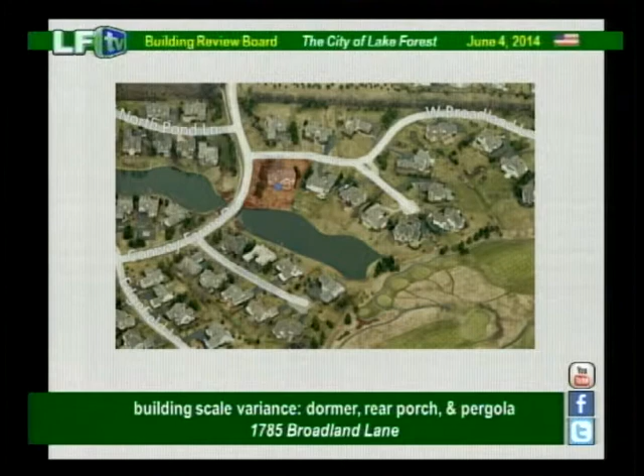A couple of items that I really want to point out of importance is the location of Conway Farms Drive in relationship to our house. Our house is this reddish area here. We do get great views of the pond behind us, and we do get some views of the golf course just down the way. We are facing south as well, majority south.

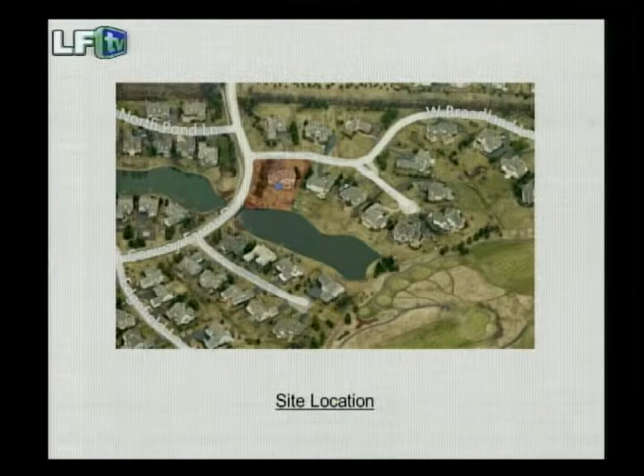So when we looked at this project, what we were looking for is we were trying to get some continuity and just take some of the massing down of our existing rear elevation. Clients love the front elevation, love the porch, love the details and the quaintness of it, and we just didn't have any of that at the rear elevation. So to us, this rear elevation did not have any consistency with that front elevation.

We had the two-story massing. We don't have any covered entryways over the access points. We have two access points into the house currently. And there was just a lacking of a connection with the exterior spaces.

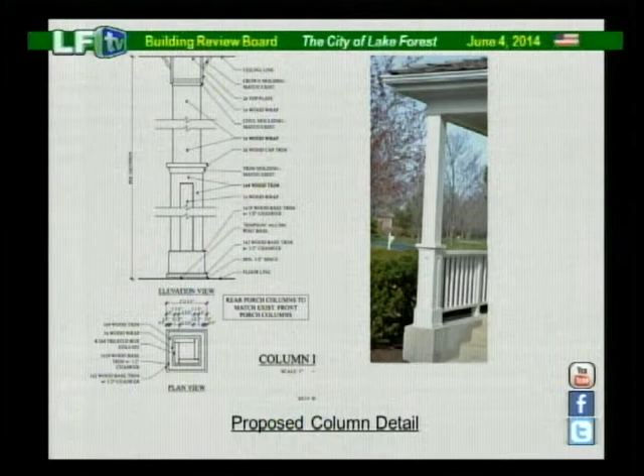Column detail - this is the column detail that we have in front of the house, and we're proposing the exact same column detail at the rear. That would be these elements here, just to tie in the front to the rear.

I'm just going to leave a couple of slides up here for visual sense, and I think the homeowners would like to say a word or two about the project, and then we'll open it up for questions.

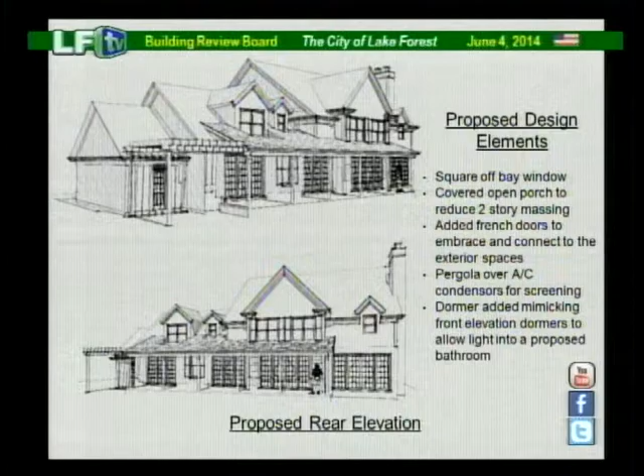Hi, good evening. My name is Ted Langan. This is my wife, Amy. We're excited to come here and talk to you all about the things that we'd like to do to the house. We love the house, we love the neighborhood, we love the open spaces, the views of the surrounding area and the golf course.

We think that we can further enhance the house and the neighborhood by the addition of this porch and really open up the back of the house and take advantage of the terrific views we have of the lake and of the golf course. So I think it'll help with the consistency and the appearance of the house. We're trying to tie the front and the back together. So with that, I'd like to take any questions that you all have.

Thank you very much. Is that it? Thank you. Okay, great. Kathy, staff report, please.

Thank you, Chairman King. This is a request for a building scale variance. The code does allow for variances and establishes criteria which the board is charged with using and reviewing. In this case, as detailed in the staff report, we believe the proposed request for a variance meets the standards. The architectural elements that are proposed actually do serve to help reduce the visual mass of the rear elevation. This house is located in a way that the rear, during certain times of the year, is viewed directly from Conway Farms Drive, a public road.

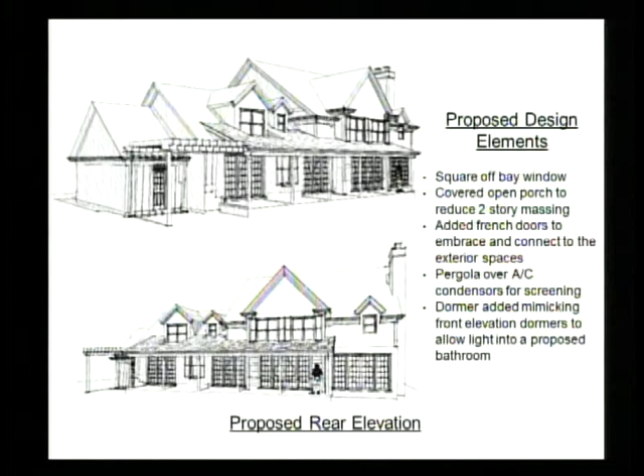Is there a proposed landscape plan? There is, I believe one was included in the packet, if I'm not mistaken. There are a bunch of dying trees right now that we're planning to remove and replace, and just add to the landscaping that's there now.

Is the intent to soften that corner from the road? Yes, definitely. There's an overall landscape plan we're working on. We're going to take all those big old dying Austrian pines out and replace them with new trees, and relocate a couple of the existing ones to add privacy and soften up that corner.

Does the HOA have an interest in the landscaping as well? Yes, they do. They control that too? Yes, they've seen it. Any neighbor concerns? None that we are aware of. Are these proposed columns in the rear matching the front columns? Yes, the detail matches. Thank you.

Good evening, a few questions, starting with the second set of French doors being added to the west. That's a lot of light looking right into effectively your door to the stairway and the laundry room. Visually, had you considered, rather than using such a full set of French doors where that view wasn't really necessary, utilizing something that might match the window you're leaving in place, just to help break up this wall of glass you're adding along the back wall?

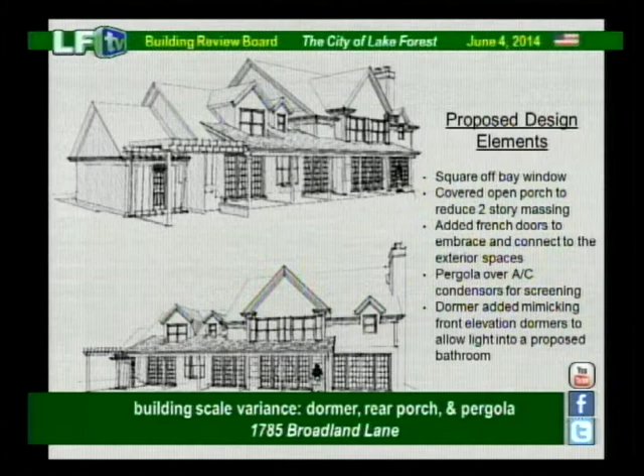Right, if I can just change slides here. Our visual sense when we were laying this out was with the columns as well. From this perspective, which is a straight-on one, we were trying to create some rhythm with the columns and the French doors behind. This seemed to be the logical place to keep that existing window with the columns spacing the way we had them, and then this triple unit between two of these columns. It took a while to get the spacing right because there are a lot of elements we were trying to fit within a column spacing that should be consistent.

Well, to take your logic, if you look at your main mass, just to the right of that, where you center the middle column in the middle of those four panes of French doors, could you not follow the same logic there? You could. I have to look at the plan here, but right back in here, I believe, is where we have our staircase. And if I slid these over too far here, I think we would miss some of the light coming to that staircase going upstairs.

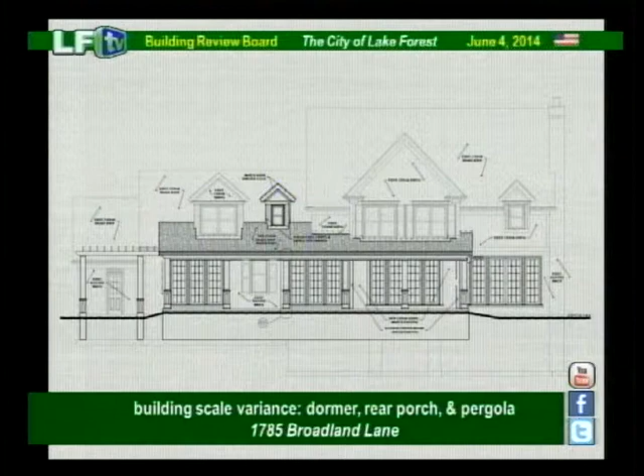Okay, that's all I have. I appreciate your addressing my comments. Thank you. Anyone else, questions?

No? Well, I think it's very nice, and the trellis is going to be a very nice focal feature for passersby coming across the pond or the roadway, which leads to a thought, purely a matter of personal preference, but it seems like a great opportunity for some hanging flower baskets or something of that type hanging from the trellis, giving it a splash of color to enhance what it is. We're thinking we're on the same page.

He's way ahead of you on that one. Oh, you're way ahead of me, okay. There you go, you probably picked out the flowers already, okay. No, I think that's great, and it fits right in with what you're doing here.

Thank you. Okay, just one question. The second floor, the additional dormer you're putting there, is there an existing bathroom there, or is that bathroom going to be made possible because of this dormer? That's a new bathroom entirely. Okay.

All right, any other questions, gentlemen? Okay. Now's a chance for anyone from the public to testify if they wish to come up. Okay, seeing none.

Any final questions from the board to the petitioner or staff? Okay, we now go into our internal board discussion and comment. Ross, you want to kick it off?

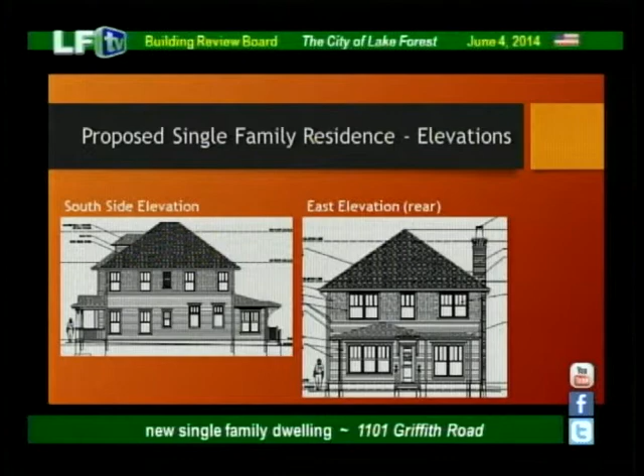Next slide is the garage. This will be consistent with the materials used in the home, and it is actually under the allowed size.

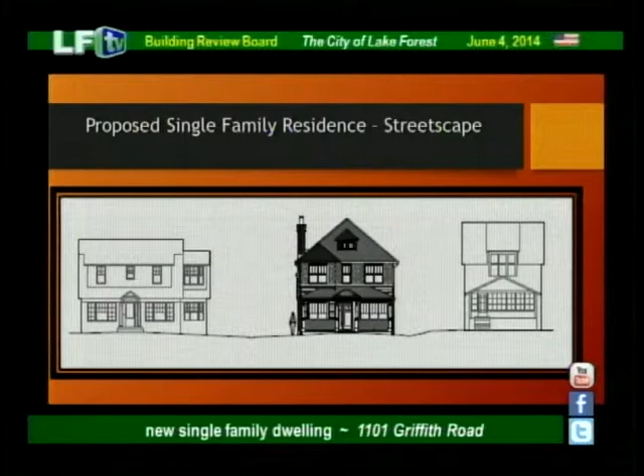The next slide here is the proposed streetscape. This is to scale and was included in the package, and it shows the massing of the neighborhood as it would exist with the new proposed residence and the height compared to the neighbors.

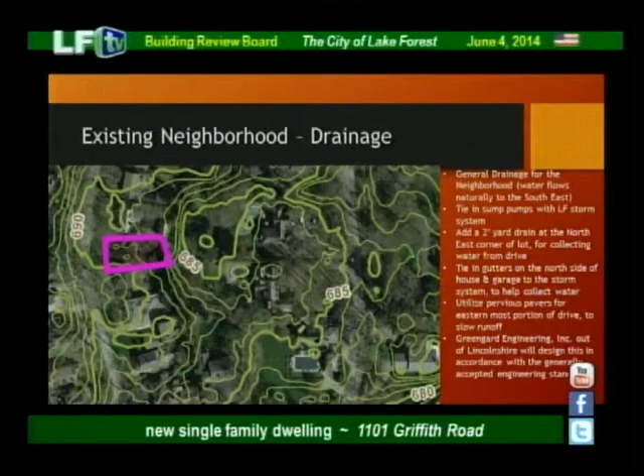The next slide shows this will all be developed by Greengard Engineering out of Lincolnshire and submitted for final approval. The overall site plan shows, in the rear, the east side of the drive proposed with pervious pavers to help slow down any water flow across the lot. The city arborist has reviewed the plans and made recommendations on the trees.

In the front left corner — actually the southwest corner, I apologize — there is a 46-inch elm, or a large elm tree. We are approximately 44 feet from that tree, so saving it will be possible. We've also moved the garage forward to save a rather large 36-inch tree on the neighbor's property to the east.

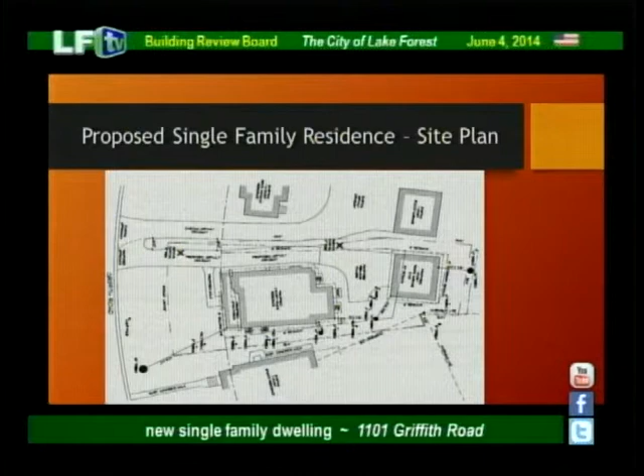The next slide shows a general proposed landscape plan with some tree groupings. Any trees removed — there are several ash on the south side of the lot currently — would be replaced per the specs and requirements with new trees and plantings. We're proposing to plant some shade trees and barriers between the driveways.

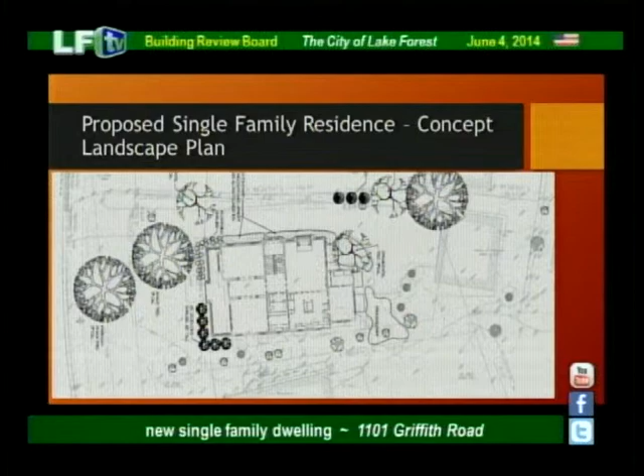So next, Scott is going to talk here about the architecture and a little bit about the home.

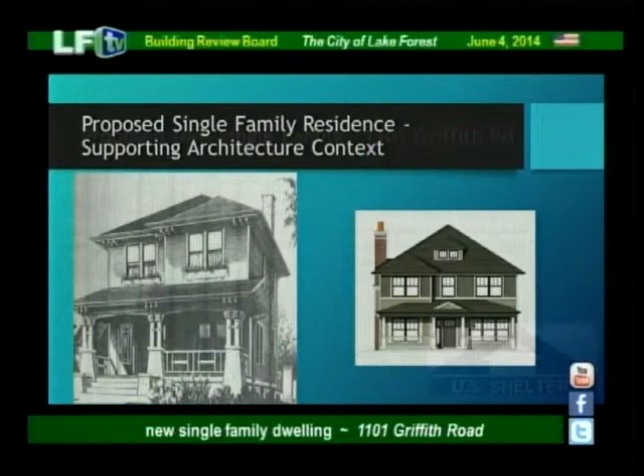Thank you, Chairman King. Anytime a vacant lot in an established neighborhood is proposed for development, it's always a tough project. In this case, this lot has been a buildable lot since the subdivision occurred in the early 1920s. This property was in common ownership with a neighboring lot, and it is a buildable lot. As was mentioned, the proposal before you is in full conformance. It meets the zoning setbacks and is actually 4 square feet below the maximum allowable bulk. It does take advantage of some design elements, so there are square footage bonuses, for instance, for the covered porch.

In looking at infill development, one thing we often hear is how it relates to the neighboring homes. In this case, the neighboring home to the north presents a very narrow elevation to this house. In addition, there's very little opportunity for landscaping on the north side because of both the driveway for this new house and the neighboring driveway.

So as we looked at the house, the two elements identified in your staff report for discussion are: first, the box bay on the north elevation, which does add an element to that north side. It certainly breaks it up a bit, but also pushes out further to the north side of the house. And then the additional mass on the front of the house at that northern corner adds a couple feet to the length of that north elevation. It also creates a front elevation that isn't quite a true American four-square.

Let me find that and get right back to you. I think that's in there, but I'll get that. Actually, you know, I may be able to get that. No, I've downloaded everything, I'm sure. We have the grading plan right here. This was all submitted to scale. You're saying the house to the north? Yes. The distance of the house to the north, I don't have that precisely without a scalable set of plans. This was—if you have the original documents...

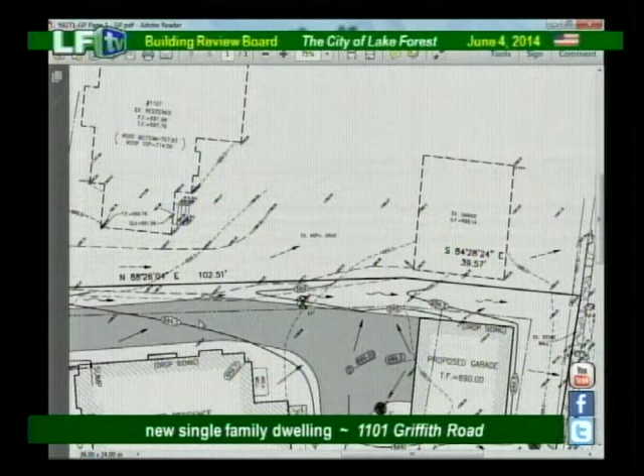As a point of reference, the proposed garage front elevation is about 23 feet across. If you compare that to the projection of the chimney and box bay, which are the same projection, you're looking at a distance approximately the width of the front of the garage. The landscape plan has a graphic scale, this one, and it looks like it would be about 35 to 38 feet, possibly, at the average, if I'm just using the graphic scale on the LA.1 plan sheet.

It looks like, yeah, 30, 35 feet. Take that - yeah, there's a little bit less than that. We're not outside of any setbacks, so yeah, it looks like it's reasonably 30 feet of separation. Thank you.

I have questions. I'm sorry, you finished? Yeah. Great.

These are directed to the architect. One of our responsibilities is to make sure the type of buildings stay true to the architectural style. One of the things when I look at this - these are great drawings, but there's too much. My first observation is that the drawing on the front elevation, which you guys call the west elevation - if you could bring that up on your slideshow.

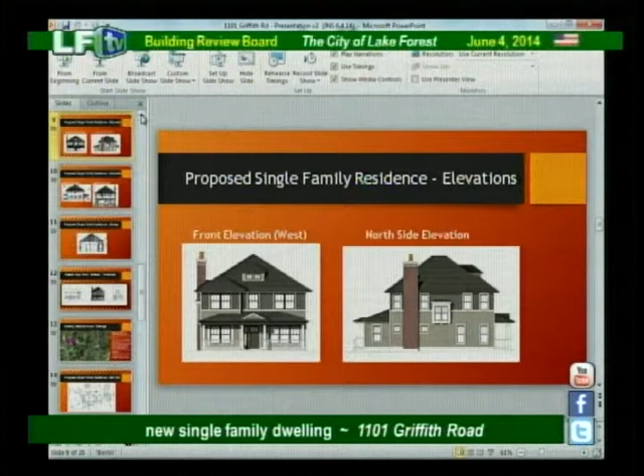The driveway is asphalt to a point, and then there's a portion we are proposing pavers to help with runoff. Was there a calculation performed on the impervious surface? I believe there was, and it clears it, yes.

Is this a for sale home? It will be. Thank you.

If you could put up the south elevation, please.

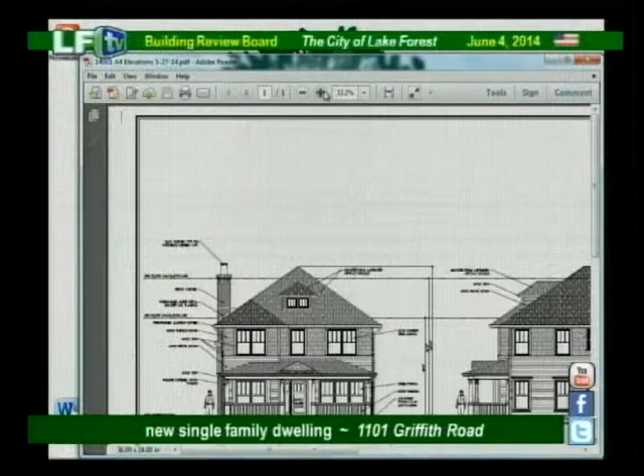The windows on the first floor are offset a little bit. The first three on the left are at one height, and the next two are a different height. Is there a reason for that? Yeah, it's the kitchen area. The two on the right that appear elevated have flat wood panels at the lower level, then transom elements at the upper level. The transoms come in above the cabinetry on the kitchen wall to provide natural light into the room from the south elevation.

Don't you think it'd be better if those were aligned at the same elevation? Well, in order to get the cabinetry storage space in the kitchen, it becomes a case of either storage or windows. If we brought them to a lower level, we looked at this as an opportunity to have both. Could you raise the ones on the left? We could, but it would change the proportion of the room. The window heads are set at door head heights.

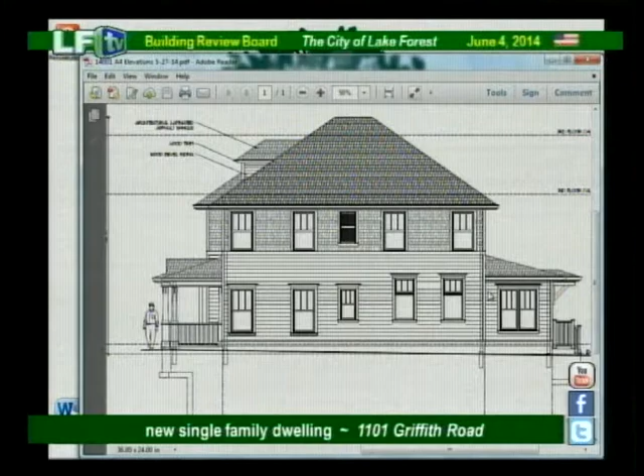They mentioned a little bit of landscaping between the house proposed here and the house to the north. Looks like there's a little strip of land there. What landscaping might you propose there, and is there anything that will actually live given that tight space?

We were told, I'll pull up the landscape plan here. We were meeting originally with Megan Newman for several months on this project through a couple different floor plans, but she said at this stage, when we submitted this, it was still preliminary conceptual, because it would depend on the approved foundation and how many caliper inches of tree we remove. We have to replace it with a certain quality of tree. So what we're providing and illustrating here is just a general idea, probably evergreen type trees to help block the neighbors, as a proposed foundation planting plan.

So I had understood the requirement is the final landscape plan gets approved before rough framing final, from the staff report, so we still have some time. So we don't have the exact species, this is just conceptual for where we plan to plant things. I believe they would live between there, I think there's 6 feet of space.

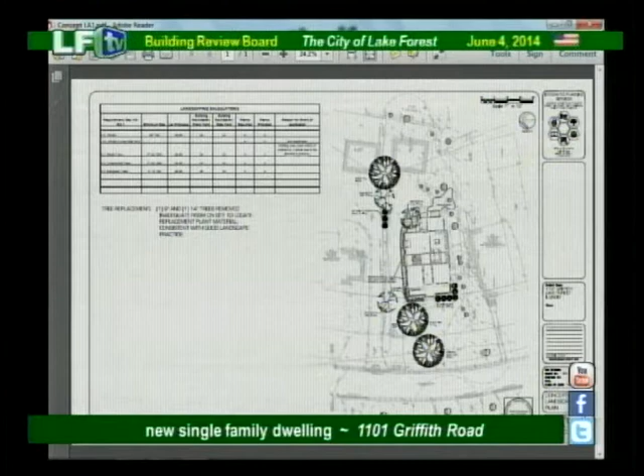And Chairman King, the other reason you don't have a final landscape plan is we require the grading and drainage plan to be finalized. If that area is needed for some swaling, that would limit the type and amount of vegetation that could go in that area. Sure, so we would work with engineering and our arborist to determine what could live there and what would not interfere with drainage. Okay, thanks, Kathy. That's all the questions I have.

Anybody, any other questions? I have a follow-up, if that's okay. If you go back to that south elevation, the transom windows you were talking about, did I hear you say that below the transom it's not glass, it's just kind of a fake panel? It's a wood panel, solid. Do you need it? I think it provides balance, overall size, the detailing. You don't see any short windows on that side of the house, so that's the logic behind why it's there.

So what would you paint that piece of wood? It would be painted to match the trim around it, a light color. The bronze color, or? No, no. Like a white? Yeah, white, like an off-white. So all the trim's going to be white, and then the windows are going to be that bronze color?

Okay, all right, thanks. Go ahead, Fred. I was going to ask the same question. I don't know if we're in the comment period or not. It's still just questions? Still just questions now, and we can certainly comment on it at the appropriate time.